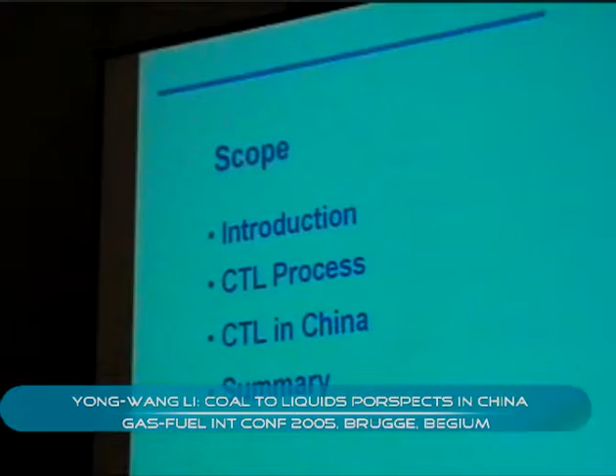First, I will introduce technology achievements in China at the Institute of Coal Chemistry. Many people in China have known the big plants of CTL, like Sasol and Shell, and the running of our pilot plant. They began to know the technology of CTL can practically convert coal to liquid hydrocarbon by FTS technology.

And now this opportunity is very large in China. China began to realize that applying CTL technology at the industrial and production scale can solve the oil resource problem.

Before talking about everything, I'd like to talk about the driving force in China: the oil supply and demand contradiction. In general, the confirmed coal reserve is above the magnitude of 2 compared to that of oil reserve. It is generally agreed that China has to use coal as a major primary energy in the long term.

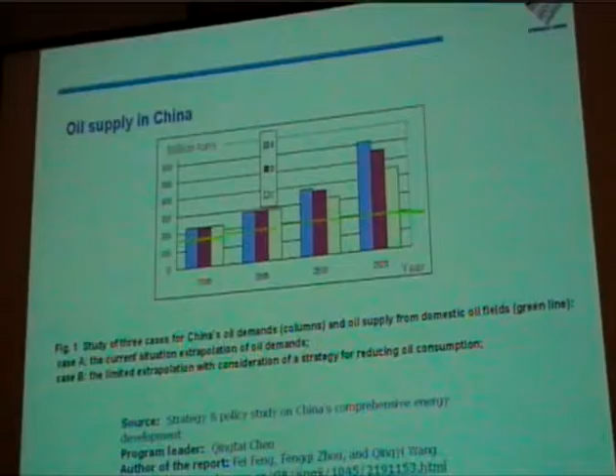This is the supply and production figure for oil demand. The blue line is the current situation extrapolation of oil demand. The red line is the limited extrapolation with consideration of a strategy for reducing oil consumption. The green line is the production scale over several years.

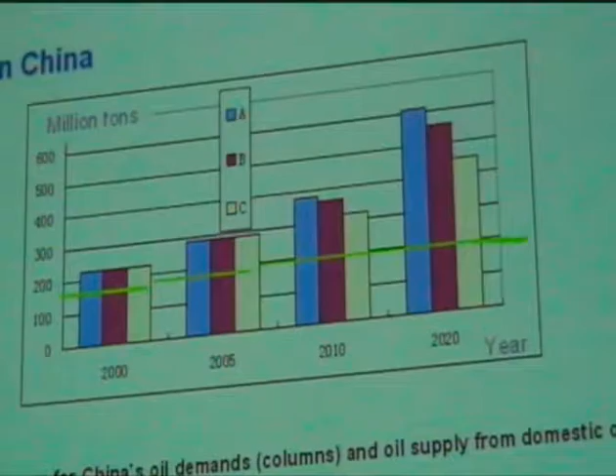From the figure we can see that by the end of 2004, we have imported oil from foreign countries, and the demand for this amount has reached 120 million tons annually. We can also see that by 2020, this amount will reach yearly 600 million tons. So there is a big gap between demand and the market in China.

China is trying to find a solution to solve this gap. Now they have realized that using FTS technology, CTL can fill some of this gap.

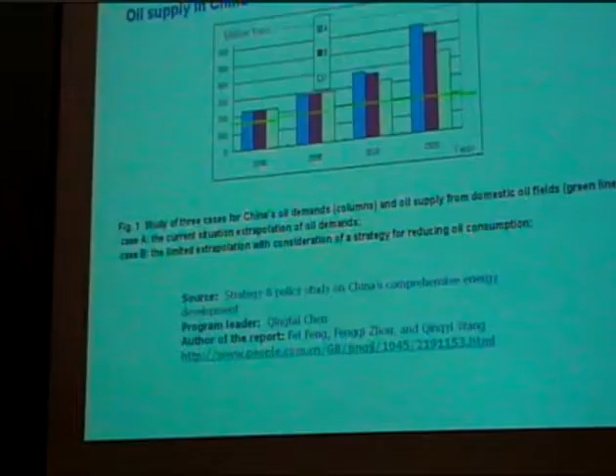This is a general CTL process from coal. Firstly, the coal gets fed to syngas and then purified to clean syngas. In the FTS process, it gets intermediate products: wax, oil, and LPG. The intermediate products, including upgrading, will get LPG, clean diesel, and naphtha. For this process, our main product is diesel.

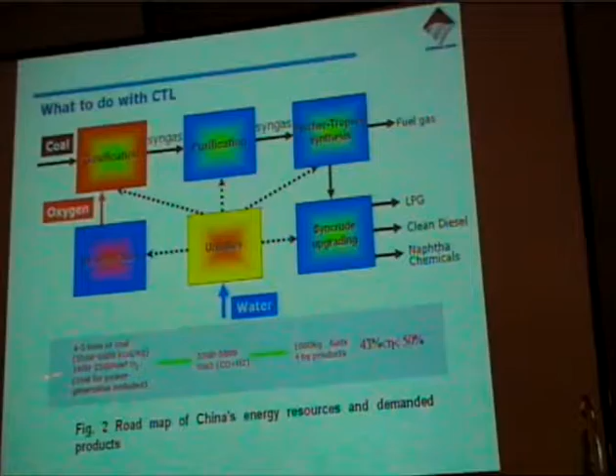We must have an air separation unit to supply oxygen for gasification. We also need utilities like cooling water, nitrogen, and similar support for the whole plant. This is the general rough data from coal to end production, and total efficiency is around 43% to 50%.

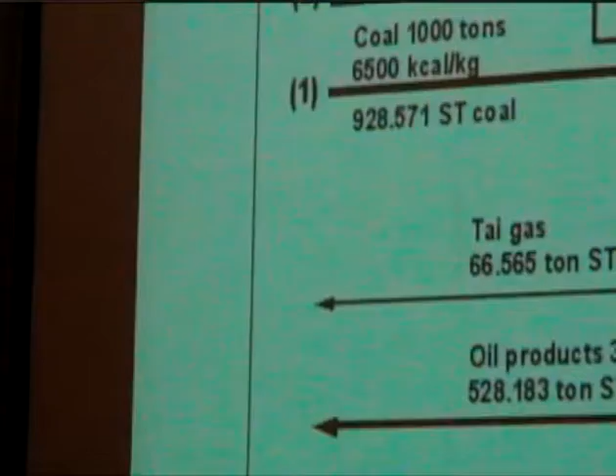This is the main frame of the in-and-out diagram of our whole reaction process technology, the CTL process. We have oxygen and coal as inputs to the process, and the end product is oil. For every value, we change it to a standard value for standard coal. This is rough data for electricity, steam, and similar outputs.

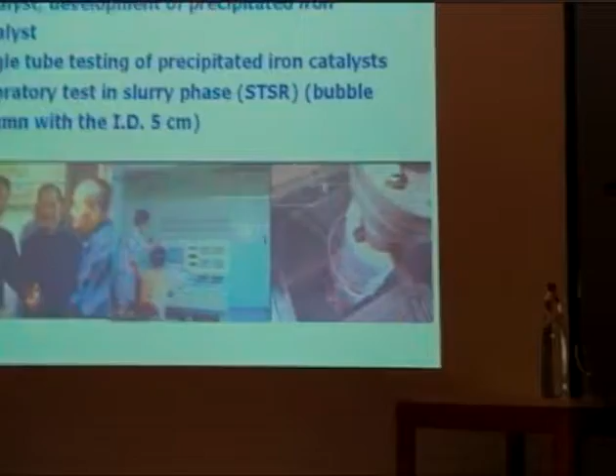Next, I will give the CTL research in China. CTL is mainly researched at the Institute of Coal Chemistry under the support of the Chinese Academy of Science, mainly in our institute. We divided the research into two stages.

One stage is before 1977, and from 1977 to 1983, we first developed a fused iron catalyst. This catalyst was first tested in a single tube. From 1983 to 1985, we built a 2-barrel-per-day multi-tube reactor pilot plant. From 1986 to 1987, we did single tube tests of an improved fused iron catalyst.

At the same time, we also developed a precipitated iron catalyst. In 1989, we did single tube testing of the precipitated iron catalyst, and at the same time developed laboratory tests in a slurry phase bubble reactor, with the bubble reactor having an internal diameter of around 5 centimeters.

From 1990 to 1993, we built a gasification plant with a capacity of 40 barrels per day, using a 50-barrel reactor, about 2,000 liters. During that time, because oil price was very low, this project could not run very well. After 1997, the oil price went up again, and FTS research changed in China again.

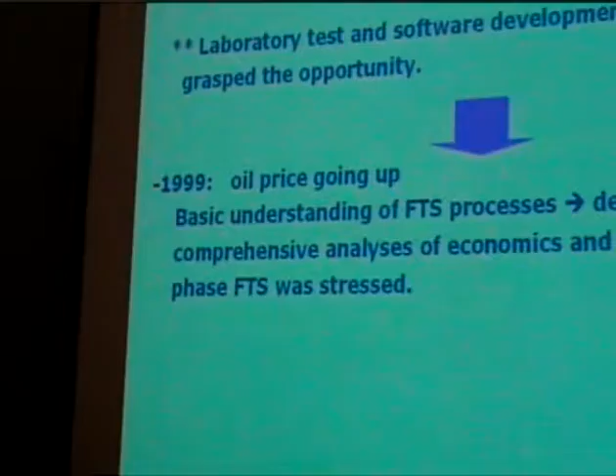Under support of the Chinese Academy of Science, we began the project again. This time, by economic and technical analysis, we decided to develop a slurry bubble reactor process.

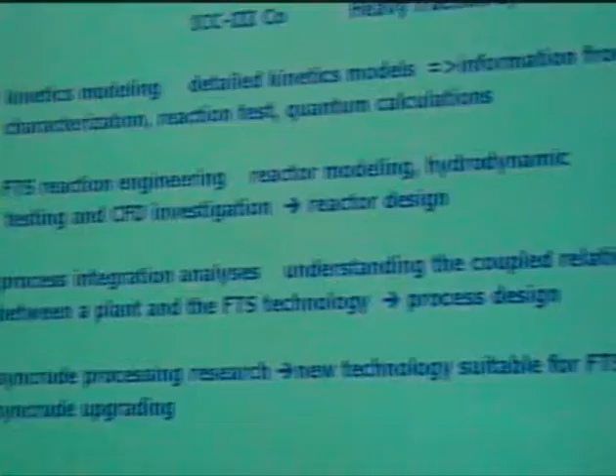First, we built a detailed kinetic model in our laboratory, getting information from catalyst characterization, reaction tests, and quantum calculation.

Based on the detailed kinetic model, we built a reactor model for the slurry bubble reactor. We also have facilities to do hydrodynamic testing and CFD investigation in our research group. Based on this information, we obtained the reactor design.

Based on the reactor model, we built a process model for the pilot plant and big plant using Aspen Plus software. For syncrude upgrading, we cooperated with other research groups to develop new technology suitable for FTS syncrude upgrading.

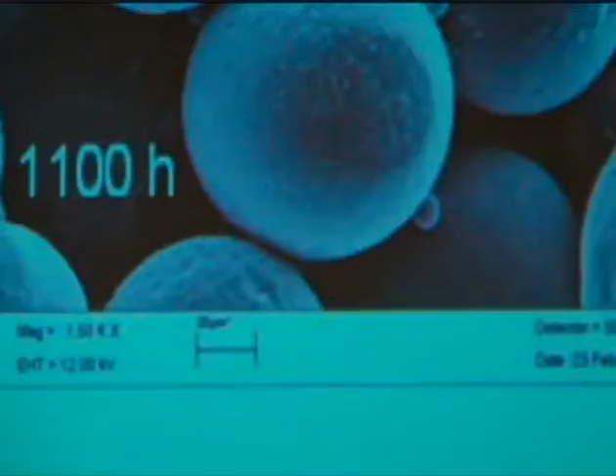This is a long-run test of the ICC1 catalyst. From the video, during the 1,100-hour test you can see the CO conversion, methane selectivity, and carbon 5 plus are always stable. This shows this catalyst can be used in our pilot plant and industrial scale plant. It's very stable.

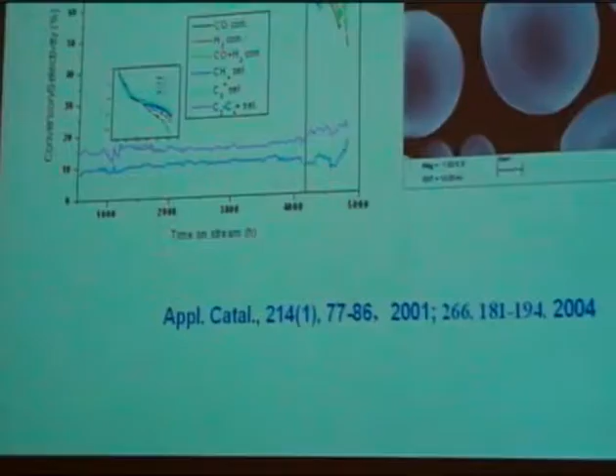This is a test of the ICC2 catalyst, an iron and manganese catalyst. From the figure, during 4,000 hours the selectivity and conversion are nearly stable, and the shape is very good. Our catalyst is formed by a spray drying process.

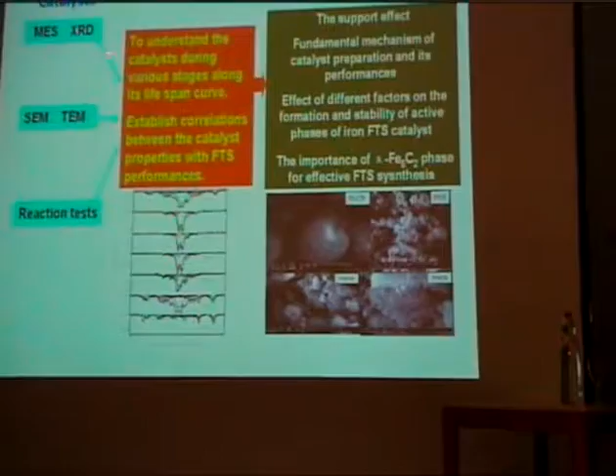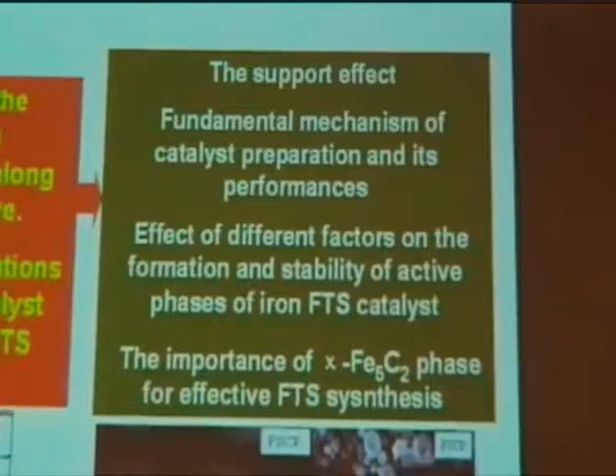In our laboratory, we use MES, XRD, SEM, and TEM to research the catalyst. From this information and reaction tests, we got a fundamental mechanism for catalyst preparation and its performance. We also learned the effect of different factors on the formation and stability of the active phase of the iron catalyst, and the importance of the Fe5C2 phase for effective FTS synthesis.

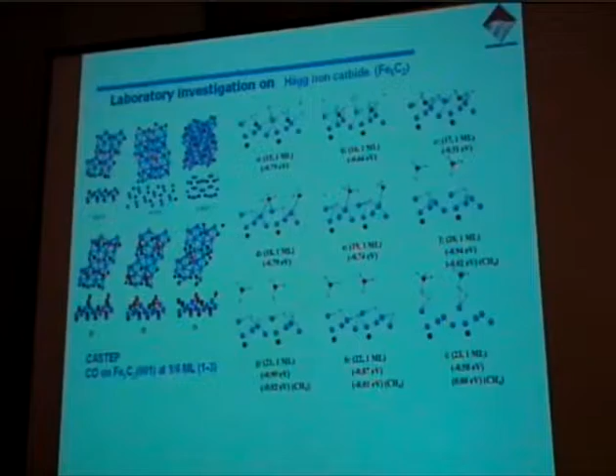In our research group, some of our researchers also did quantum calculations for CO and hydrogen adsorbed on the surface of the catalyst, Fe5C2. This is the result for hydrogen-to-CO ratio of 1.

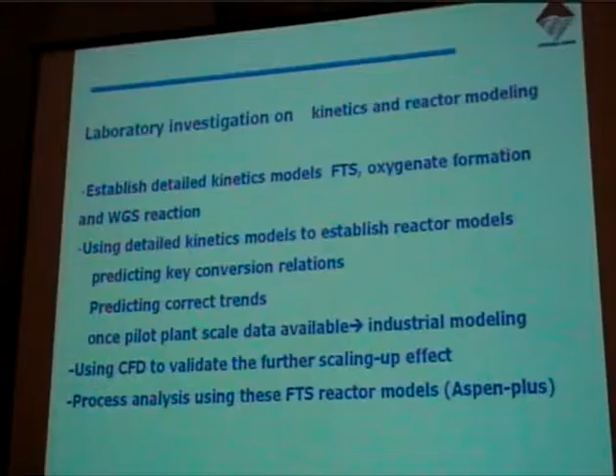So we summarize our laboratory investigation on kinetic and reactor modeling. We established a detailed kinetic model for the FTS and WGS reactions. We extended our kinetic model to oxygenate formation and used the kinetic model to establish the reactor model. With our reactor model, we predict conversion relations and correct trends. Once plant-scale data are available, we correlate them with our reactor model and process model, making our reactor model reliable at plant scale.

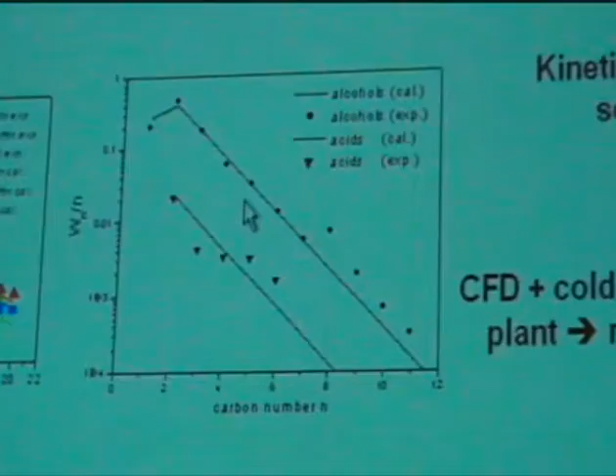We build the process model with Aspen Plus. This is the hydrocarbon distribution curve, showing experimental data and calculation data. This is the trend for oxygenate data, and this is the result of our CFD calculation.

The diameter is 0.35 meter. This is the CFD calculation for a bigger reactor with a diameter of 4.6 meters. In this diagram, we use Aspen Plus to build the process flow sheet for our pilot test.

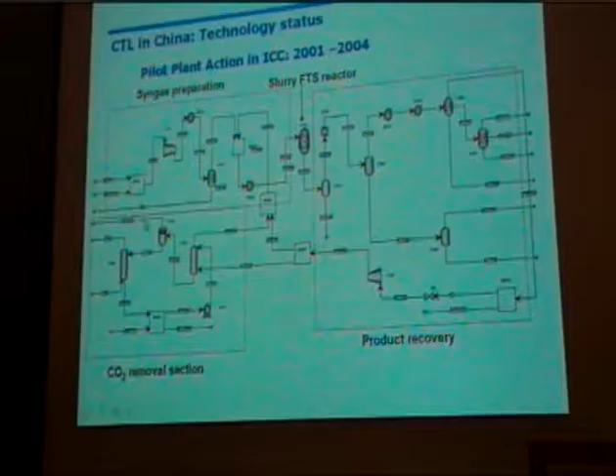We divided it into several parts: syngas preparation, slurry reactor, and product recovery. We also have a carbon dioxide removal section as an option.

Next I will explain the pilot plant operation. By the end of September 2002, we finished building our pilot plant, and the first run test lasted 25 days. During 2003, we conducted 3 rounds of core technology testing. Now we have finished the pilot plant study and begun the process design package.

This is the pilot plant operation, showing the basic process definition based on the pilot plant, without some rough data.

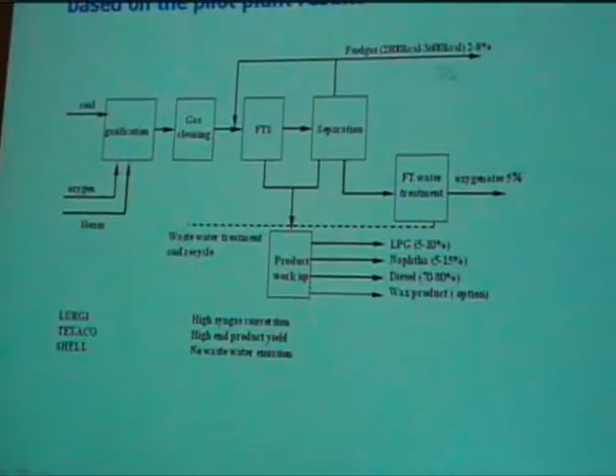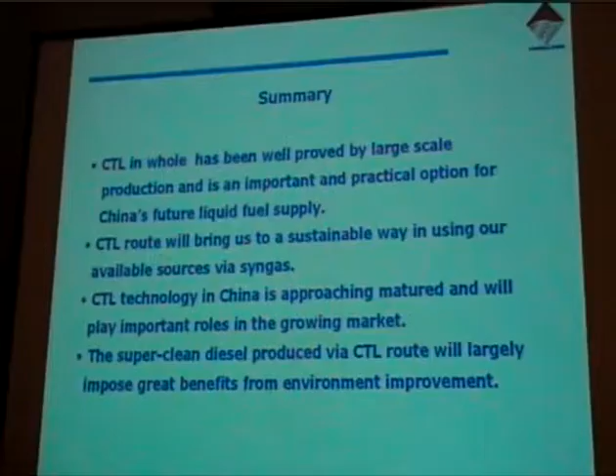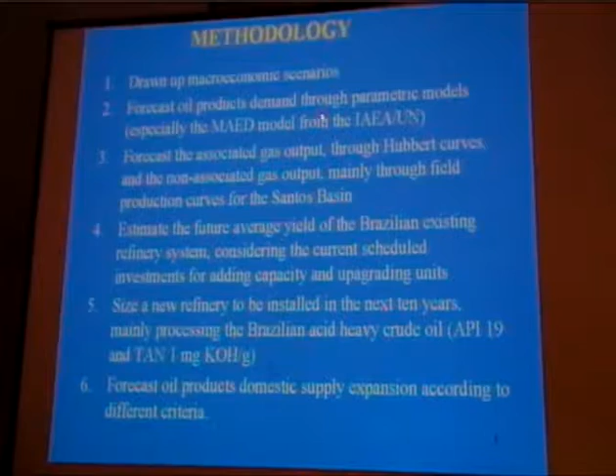This is the methodology. I have to sum up something here, but in summary, we have used several models for forecasting our fuel oil and oil products demand. These mathematical models mostly come from a joint study that we did with the International Atomic Energy Agency of the United Nations. We also forecast the associated gas output through Hubbert curves and the non-associated gas output mainly through field production curves for the Santos Basin.

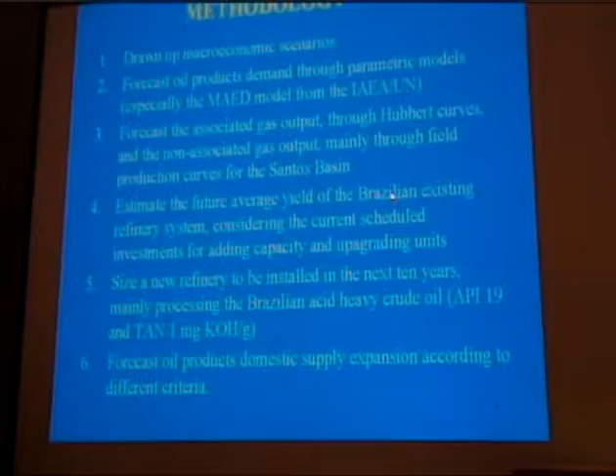Santos Basin is located at the southeast region of Brazil, and we have recent discoveries of non-associated gas that perhaps should be used, should be developed. And we estimate the average yield of the Brazilian existing refining system.

Brazil is converting its 12 refineries in order to improve diesel production and to reduce gasoline production, also investing in treating systems, treating units. We also size a new refinery to be installed in the next 10 years.

This is a great question in Brazil. Brazil will install a new refinery in the next 10 years. This is quite certain for Brazil. But as of today, we are studying several schemes: a scheme for gas oil, a scheme for petrochemicals, and even a scheme for gasoline.

But Brazil has surplus gasoline as of today, and this is the problem. Brazil is reaching self-sufficiency in oil production, but Brazilian oil is mostly acid heavy crude oil - not so heavy, but heavy; not so acid, but acid too. And we forecast oil products domestic supply expansion.

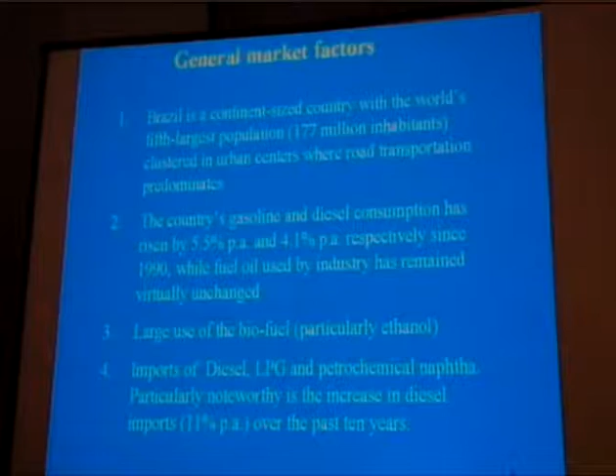General market factors - I don't know if everyone is aware about the Brazilian situation. Brazil is a continent size country. The country's gasoline and diesel consumption has risen by 6% per year and 4% per year. But gasoline is a specific situation in the 90s.

Now we are forecasting that gasoline consumption perhaps will be reduced in the next 15 years. We are going to see that in the presentation. This is a specific situation of Brazil, the large use of biofuels, mostly ethanol. Ethanol is competitive in Brazil, it's competitive with oil priced at $25,

$30 per barrel. So now we are restarting the use of ethanol in Brazil. In fact, we use ethanol as an additive to gasoline, and we have some old cars with ethanol dedicated motor fuels. But now we are starting the use of ethanol by using flex fuel cars. And this is important: Brazil imports a lot of diesel, LPG, and naphtha. Diesel is the great concern for the Brazilian policy.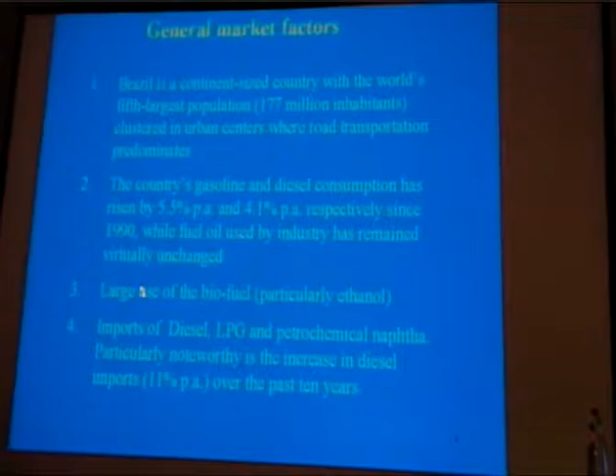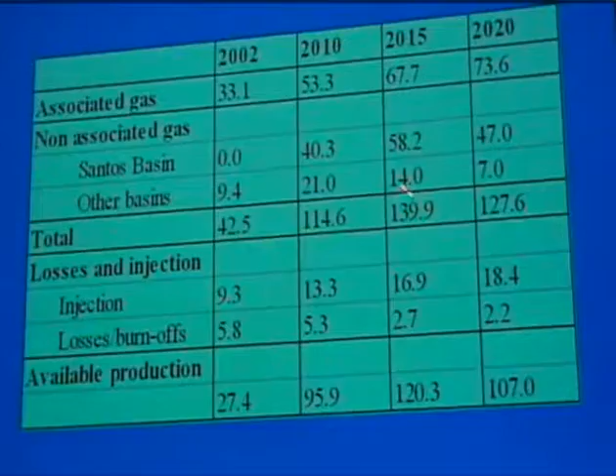This is our natural gas output forecast. As I told you before, we used Hubbert curves to forecast associated gas. In fact, we forecast oil production, and the associated gas came from the oil production forecast.

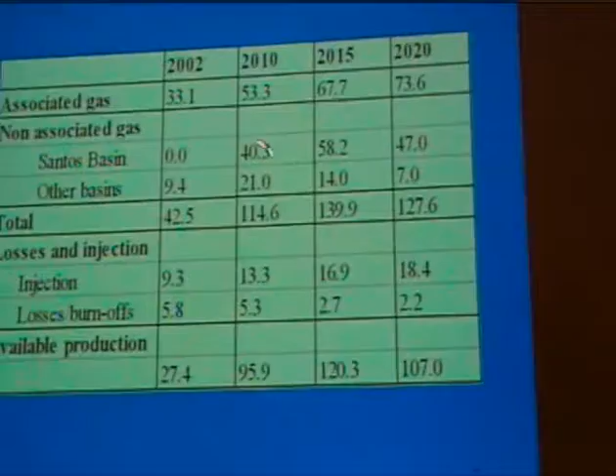And here we have the Santos Basin. Santos Basin was discovered in 2002, and we really do not know for certain what the proven reserves of Santos Basin are—perhaps something between 300 and 400 billion cubic meters. And this can be the expected production coming from the non-associated gas in Santos Basin.

This is a quite new situation in Brazil. In fact, associated gas is the main gas output in Brazil, and now we are going to face a new situation.

Brazil also imports gas from Bolivia and Argentina—around 30 million cubic meters per day from Bolivia, and around 10 million cubic meters per day from Argentina. So this can be the available production in Brazil. I also have to tell you that Santos Basin and this associated gas are also located in the southeast region of Brazil. So the southeast region concentrates the refining, the market, and also the oil and natural gas production in Brazil.

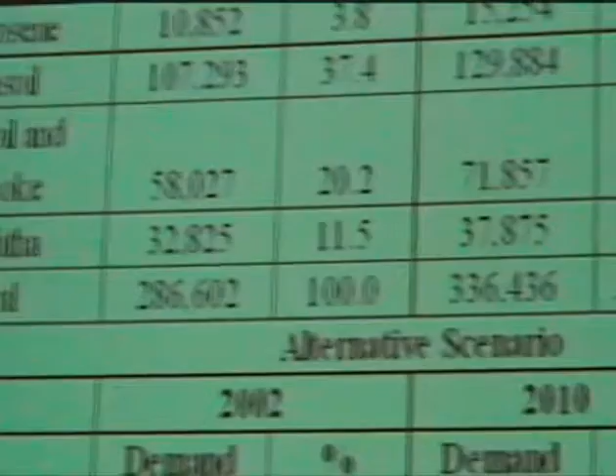So we ran several macroeconomic models, and also econometric and parametric models for oil products demand. We also ran some optimization models for oil products supply and demand, and we have this result. I can stress this result and its details—I think in the paper some of the details are also expressed.

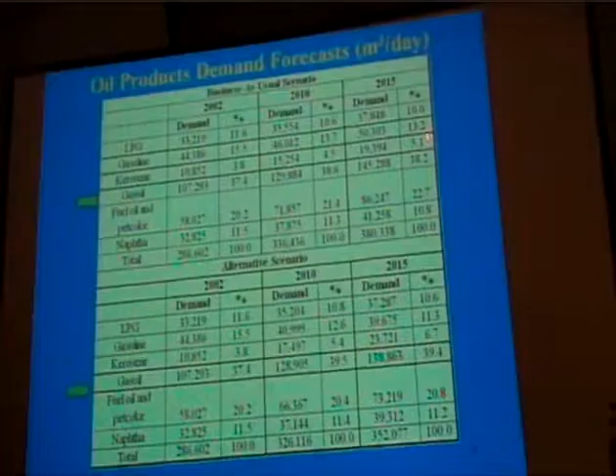But the important thing here is we had two scenarios. In this scenario we have more flex fuel cars and fuel conservation programs. In this other scenario, you have a kind of fixed, frozen situation. But in both scenarios, gas oil—diesel—is going to increase. And we have a situation of gasoline not increasing very much in the business-as-usual scenario, and even decreasing in the alternative scenario.

This is a specific situation facing Brazil. Brazil has surplus gasoline and has to increase diesel production. The refineries in Brazil also have, as of today, a large yield of diesel production, so we don't have very much potential to increase gas oil production in our existing refineries. Perhaps we're going to build another gas oil refinery in order to face this problem.

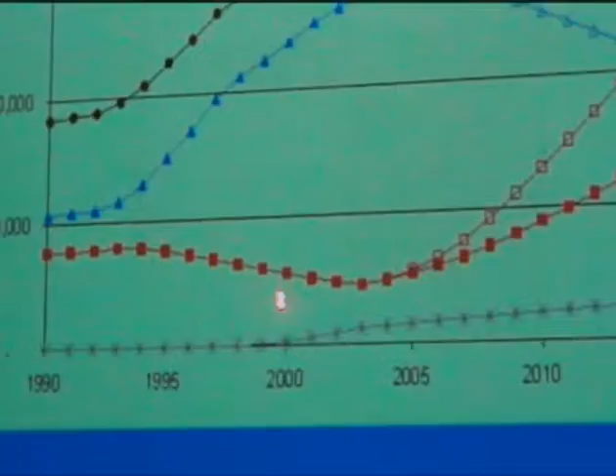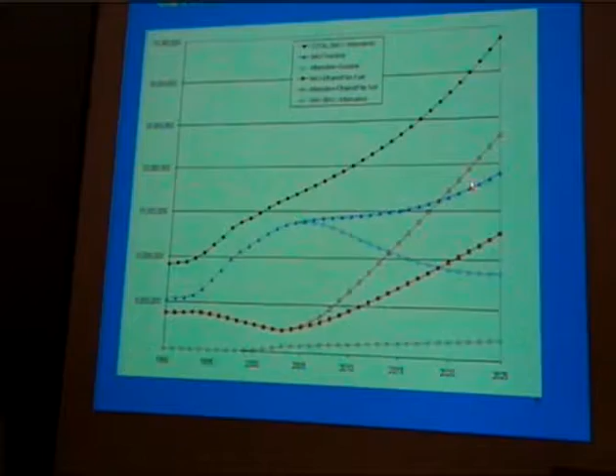And this is the ethanol fleet. As we can see, this ethanol fleet is going to rise drastically because of flex fuel cars. As of today, 70% of Brazil's new cars are flex fuel, so perhaps this will be 100% in the next 5 years for light vehicles. Flex fuel cars can run with ethanol or gasoline. But since ethanol production is also concentrated in the southeast of Brazil, and the light vehicle fleet is concentrated in the southeast of Brazil, mostly flex fuel cars will run with ethanol as fuel.

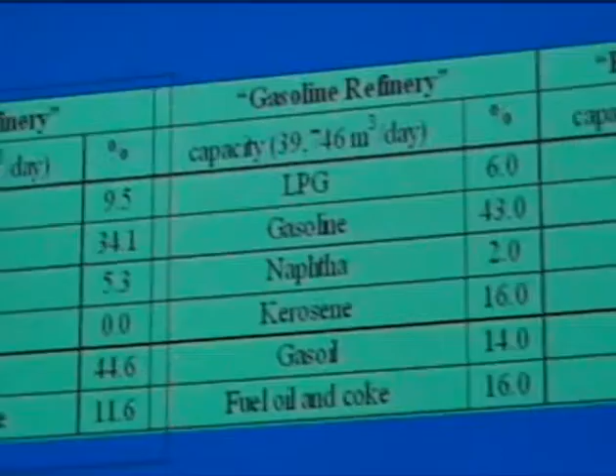We also sized 3 options for Brazil. In fact, in our paper we focus on this situation, the gas oil refinery. These are 3 sized refineries, part of our study also for the Ministry of Mines and Energy.

But also this refinery here is perhaps the most likely refinery for the next 5 years, because of some private partners willing to invest with Petrobras in the southeast region of Brazil too. But perhaps this will not be a petrochemical refinery as shown here with a DCC unit, but rather a petrochemical refinery more dedicated to propene and ethene.

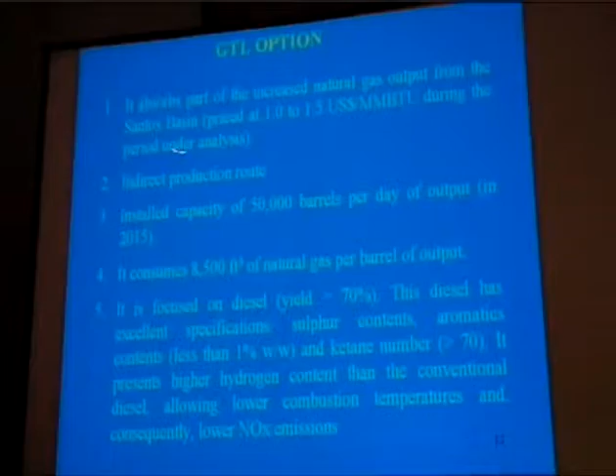The GTL option will absorb, as I told you before, the Santos basin production, the indirect production route. In fact, this GTL option was not sized by us; it came from scientific literature. We are not experts in GTL. In our university we have some teams studying GTL, but for us here the most important thing was to have a kind of grass-root plant and forecast, as a sensitivity analysis, the impacts of a GTL plant on the optimization of fuel supply in Brazil.

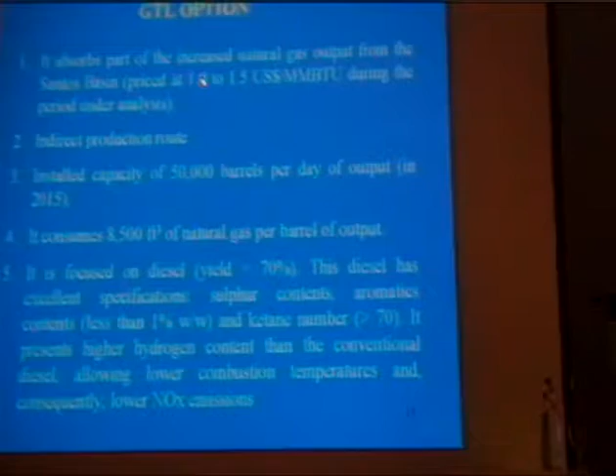So for our gas oil refinery, as planned and sized by us, we have the detailed sizing. We have some $3 billion of investment and a given capacity. And the GTL plant, which comes from the literature, is $1.5 billion.

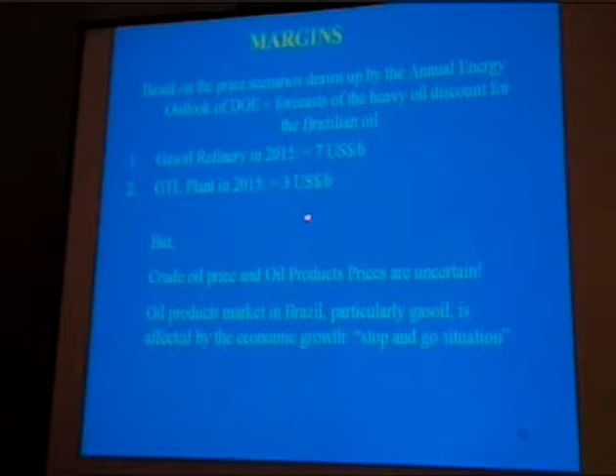The margins in 2015 for the gas oil refinery are forecasted to be between $5 and $10 per barrel. It depends on the oil price. We used the outlook scenario of the DOE for oil price, but also had to forecast the oil price discount due to the characteristics of Brazilian oil, which is acidic. We have some models to forecast this discount for Brazilian oil.

As of today, Brazilian oil faces a discount of between $10 and $12 per barrel against the refinery acquisition cost in the US. But historically this was $5 to $7 per barrel.

The GTL plant has a lower margin, but crude oil price and oil product prices are quite uncertain. Also, the oil products market in Brazil, particularly gas oil, is affected by economic growth. As I told you before, gas oil is not used for light vehicle transportation; it's mostly used for freight transportation in the industrial sector. Brazil faces a stop-and-go economic situation, for example 4% per year GDP growth, then negative growth, then 5% again. So we have this kind of stop-and-go situation.

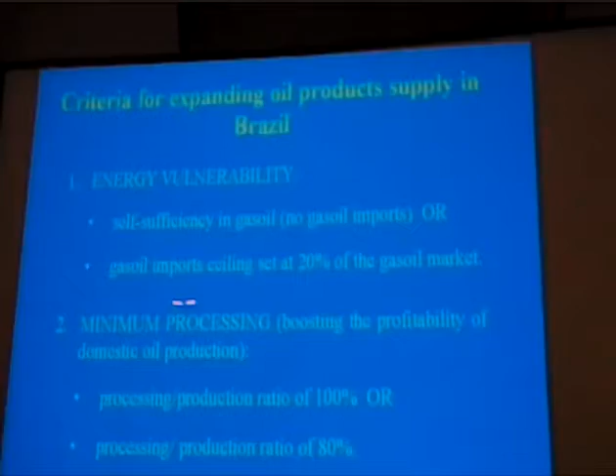Then we have these criteria, used as restrictions in our optimization model. We have an optimization model in order to maximize the revenue of the refinery system in Brazil, subject to restrictions, and this is a possible restriction: energy vulnerability.

This is a kind of historical policy in Brazil to ensure self-sufficiency. For gas oil, this is a stronger policy, but this is, let's say, the most likely policy for the Ministry of Mines and Energy, to have a ceiling set at 20% of the gas oil market. This is perhaps the target of the Brazilian oil company, to process Brazilian crude oil and boost the profitability of domestic oil production.

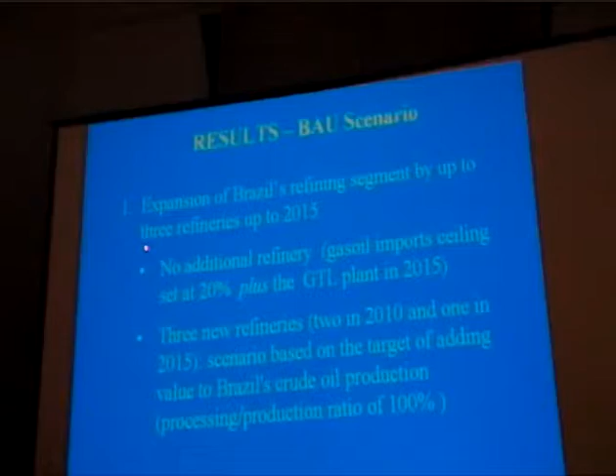Coming to the results, as you can see, in the business-as-usual scenario we expand the Brazilian refinery system by up to 3 refineries. But using the GTL plant, we do not need a new refinery under the vulnerability scenario criteria. GTL plants tend to be less versatile than a refinery, but Brazil now faces high interest rates and GTL has a lower fixed cost, so perhaps the GTL plant can be a useful solution. The alternative scenario is quite the same situation.

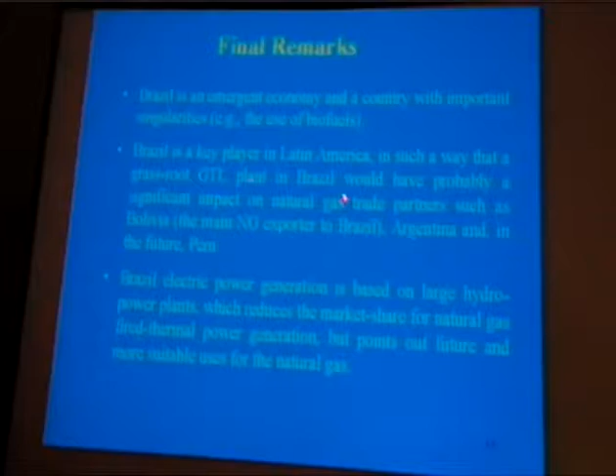I'll go through the final remarks. Brazil is a key player in Latin America, and a GTL plant in Brazil would probably have a significant impact on natural gas trade partners, as I mentioned - Bolivia, Argentina, and in the future, Peru. But the natural gas in Brazil will not be used much for natural gas-fired thermal power plants - it's not competitive with hydro, coal, or biomass. So we have to find uses for the natural gas. GTL can be a future solution.

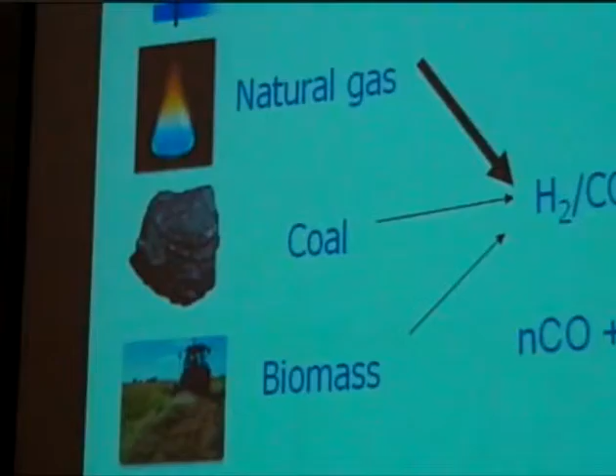Today I will talk about transient studies of the elementary steps of Fischer-Tropsch synthesis. This work was performed in Lille, in the laboratory of catalysis. Some general information: in Fischer-Tropsch synthesis we produce valuable hydrocarbons from synthesis gas, which can be generated from natural gas, coal, or biomass.

If we talk about chemical thermodynamics, at the usual conditions of Fischer-Tropsch synthesis, chemical thermodynamics favors the reaction at temperatures up to 340 degrees C and pressures up to 40 bars. If we talk about the yield of hydrocarbons, the yield depends mostly on chemical kinetics - which is what I'm going to talk about now.

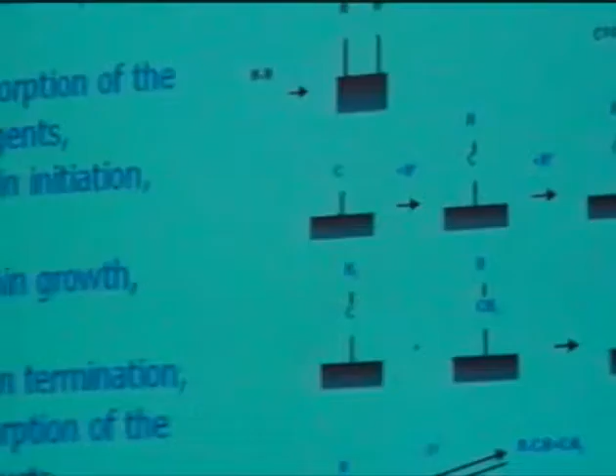The next slide shows a simplified, brief mechanism reaction pathway of Fischer-Tropsch synthesis, deduced from the literature. The first step is adsorption of hydrogen and carbon monoxide. The second step is chain initiation, which is produced...

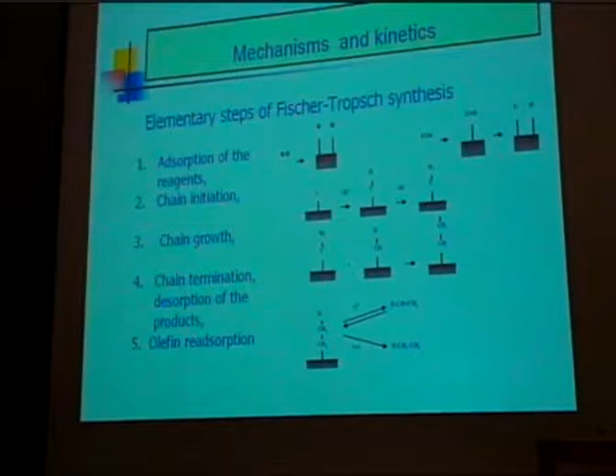I will continue. The first step is adsorption of hydrogen and carbon monoxide. The second step is chain initiation, which results in production of a CHx monomer. The third step is chain growth - polymerization - and then chain termination, which results in desorption of paraffin and olefin. If we consider Fischer-Tropsch kinetics, we have to take into consideration the possibility of olefin readsorption.

The objective of this work is to study the key elementary steps of Fischer-Tropsch synthesis in a pulse reactor, under transient conditions. We will talk about hydrogen chemisorption, carbon monoxide chemisorption, olefin chemisorption, and carbon monoxide hydrogenation to methane - right now we are not considering polymerization. In this work we use a cobalt-silica supported catalyst promoted with ruthenium, in a pulse reactor with detection of the product by mass spectrometry.

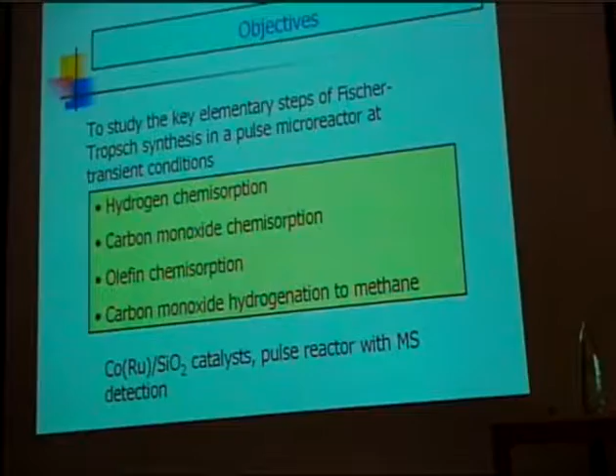The outline of the talk: first we discuss the kinetics of hydrogen and carbon monoxide and olefin chemisorption. Then, on the basis of this data, we build hypotheses about the steps, and try to use the hypotheses to model the transient responses during carbon monoxide hydrogenation to methane.

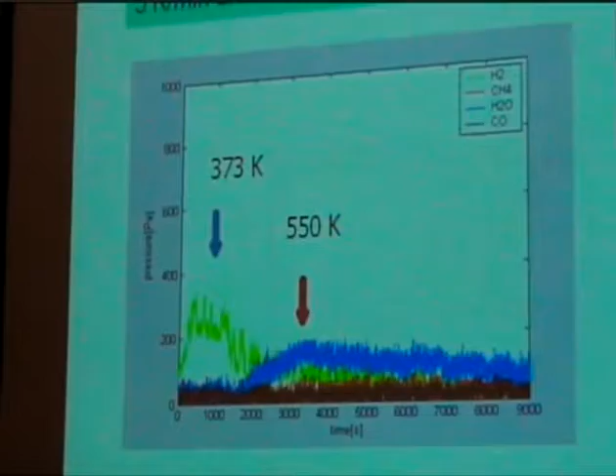First, some data about hydrogen chemisorption at moderate temperature. Here we adsorb hydrogen at relatively low temperature, a little higher than ambient, and measure irreversible hydrogen uptake by the catalyst. When we measure the TPD with detection of the product by mass spectrometry for this catalyst, we see desorption of hydrogen at about 373 K, and at higher temperature there is desorption of water.

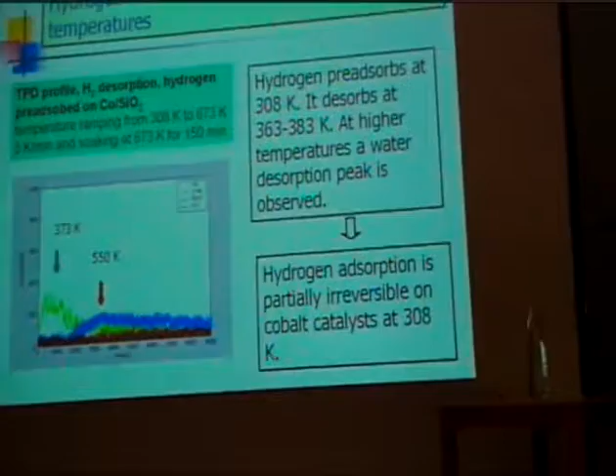What hypothesis can we deduce from this data? Hydrogen adsorption is partially irreversible on the cobalt catalyst at relatively lower temperature - there is hydrogen uptake by the catalyst, and hydrogen desorbs from the catalyst at really low temperatures.

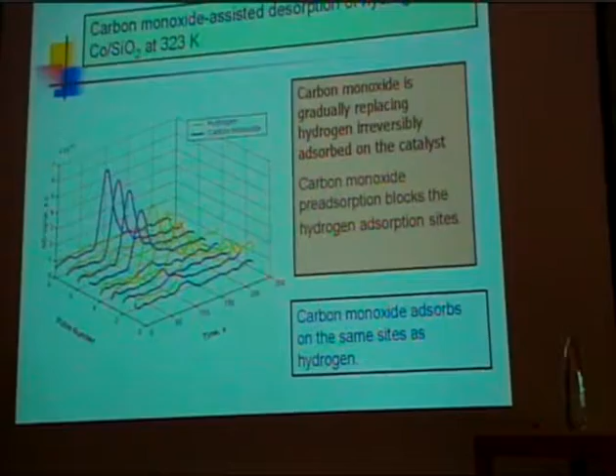We then studied adsorption of carbon monoxide on the catalyst with preadsorbed hydrogen. When sending a pulse of carbon monoxide onto the catalyst with preadsorbed hydrogen, we see desorption of hydrogen - meaning carbon monoxide is gradually replacing the hydrogen that was irreversibly adsorbed. In experiments where we preadsorbed carbon monoxide and tried to replace it with hydrogen, there was no effect. This means carbon monoxide preadsorption blocks the hydrogen adsorption sites where hydrogen adsorbs irreversibly, suggesting carbon monoxide and hydrogen probably adsorb on the same metal sites on the catalyst.

Then we studied hydrogen adsorption at higher temperature, closer to Fischer-Tropsch reaction conditions. In this case, no irreversible hydrogen uptake was observed, and when we sent pulses of hydrogen, they were not broadened after contacting the catalyst.

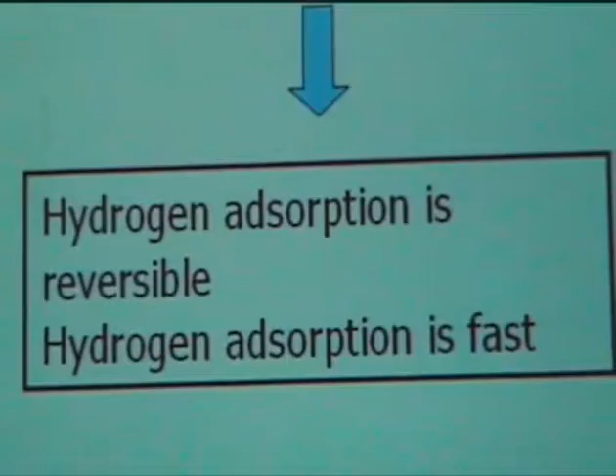So in this case, we see that since no irreversible adsorption is observed, hydrogen adsorption is mostly reversible, and hydrogen adsorption and desorption are relatively fast, not broadening the pulses which are sent into the catalyst.

So then we studied carbon monoxide adsorption. This is a pulse of carbon monoxide in a flow of helium at 423 K. You can see here that the first pulse of carbon monoxide is completely adsorbed by the catalyst, so there is irreversible carbon monoxide uptake by the catalyst at this temperature.

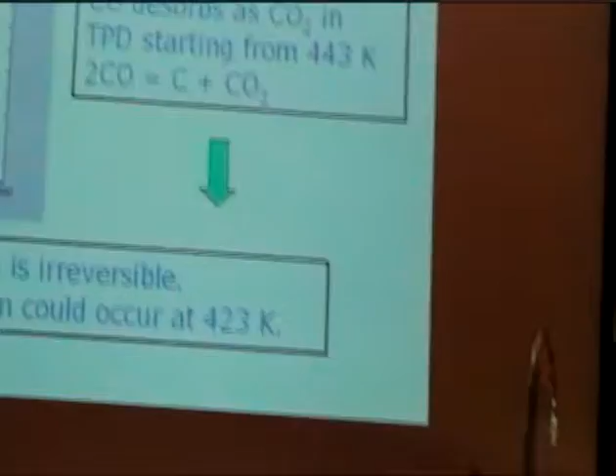After sending several pulses of carbon monoxide, we measured TPD with MS detection. You can see here that there is no carbon monoxide desorbing from this catalyst when we start heating from this temperature to higher temperature. We can see only appearance of CO2, starting from 443 K.

So from this, we suggest that carbon monoxide adsorption is probably irreversible since the pulse is completely adsorbed by the catalyst. And we also suggest that there is carbon monoxide dissociation, since the only product of carbon monoxide adsorption is CO2.

So then we also studied adsorption of propene, an olefin, on cobalt catalyst. In this case, we have different phenomena being produced. First, when we send the pulse of propene to the catalyst, we see that some of the propene is being chemisorbed by the catalyst. However, we can also see that there is some release of propene.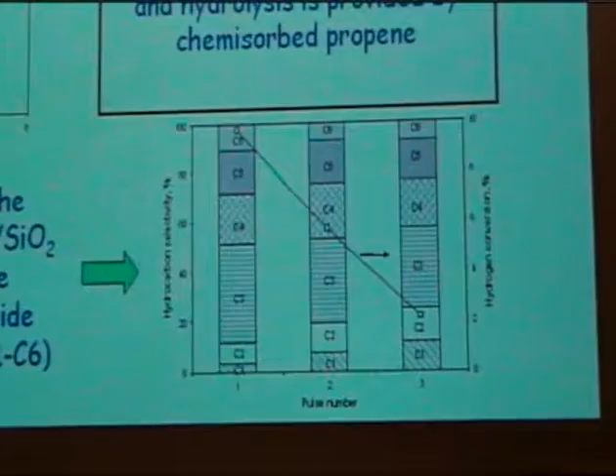So what we call here is the effect called propene autohydrogenation. This reaction was previously observed on monocrystals of cobalt metal and on platinum catalyst. What happens here is that propene is adsorbed, and during the absorption it releases some hydrogen, which is involved in hydrogenation at lower temperatures of propene to propane.

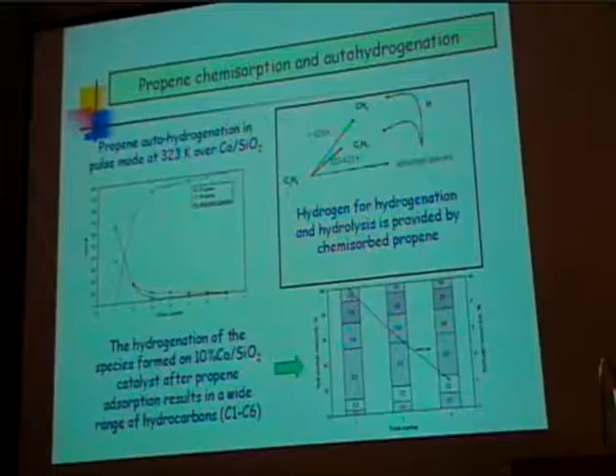At higher temperature we can see that there is production of some methane. The second step here was to study what really happens, which species we have on the surface of the catalyst. For that, we tried to hydrogenate the chemisorbed propene species with hydrogen. When we did this, we can see that we have a whole bunch of hydrocarbons from C1 to C6, meaning that during propene chemisorption on cobalt catalyst, we have some cleavage of carbon-carbon bonds.

So now to summarize, I have to summarize some hypotheses which will be used later on for modeling. The first is we suggest that hydrogen absorption is fast and reversible at Fischer-Tropsch reaction conditions, and carbon monoxide absorption is irreversible and dissociated. So then we will use this approach for the modeling here.

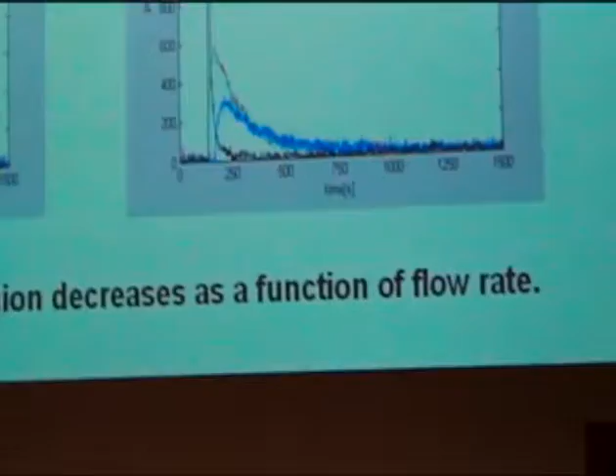So here we did the experiments sending a pulse of carbon monoxide in a flow of hydrogen on this catalyst, in the flow of hydrogen. Here you can see the responses which we have. The first very narrow peak is carbon monoxide, which is not reacting in this condition.

The first broad peak is methane, and then we see also water. In this condition, because we have a lot of hydrogen, we see only methane, we don't see any hydrocarbons. You can also see the carbon monoxide conversion as a function of flow rate, which is normal, as conversion depends on the residence time.

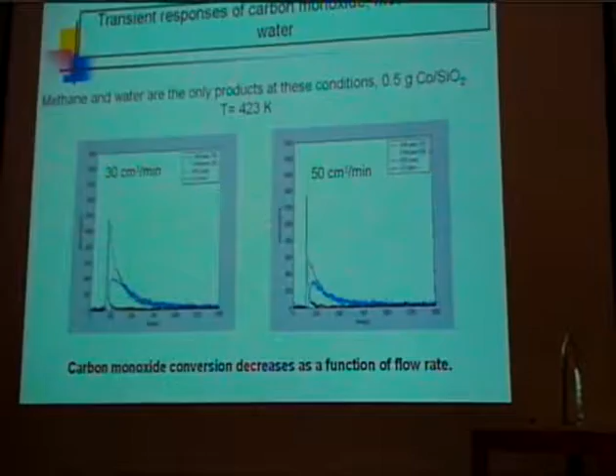So then, using this hypothesis that hydrogen absorption is reversible, we suggest it is quasi-equilibrated at this temperature. Carbon monoxide absorption is irreversible and dissociative, and we also admit that water absorption can be reversible. So here we have considered three mechanisms, based on this hypothesis, to select the best one.

So for modeling, we have been using a modified Kobayashi model. In this case, the catalytic reactor can be represented by a set of stirred tank reactors. For each reactor, we have been using a system of differential equations for gas components and for adsorbed species. We solve them using MATLAB software.

The best results we obtained for this mechanism, which is shown here, and here we show the results of fitting. You can see that we can fit pretty well carbon monoxide and methane. For water, the results are a little bit worse than for methane.

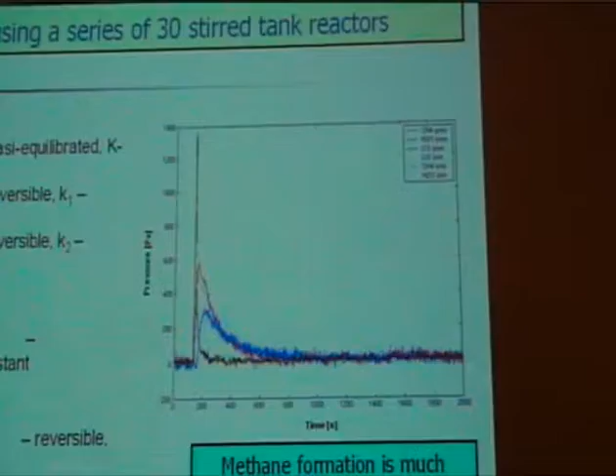We can also evaluate the set of kinetic constants for this mechanism. What we can see here, I just want to show you, is that we compare the constants K3 and K5.

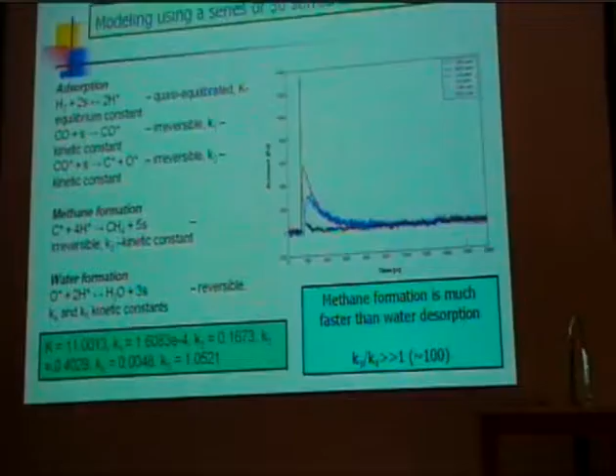K3 is the constant responsible for methane formation on the catalyst, and K5 is for water formation. We can see that K3 is much higher than K5, so methane formation seems to be much faster than water desorption from the catalyst. For this experiment, the factor is 100. So we can suggest that in some cases, water desorption from the catalyst can be a rate-limiting step even in steady state conditions.

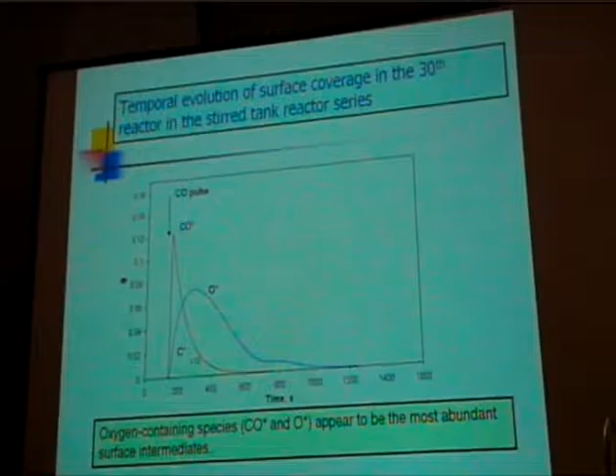The next slide shows the results of this modeling. We calculated the coverage of the catalyst, and we projected our reactor as 30 stirred tank reactors. So here is the last reactor. What happened when we sent a pulse of carbon monoxide? First, this is a pulse. The first carbon monoxide that adsorbs on the catalyst increases coverage by non-dissociated CO. Then there is dissociation to carbon and oxygen. From these kinetic constants, it follows that oxygen-containing species coverage is much higher than carbon species. So the oxygen-containing species, such as CO and oxygen, appear to be the most abundant surface intermediate during this reaction.

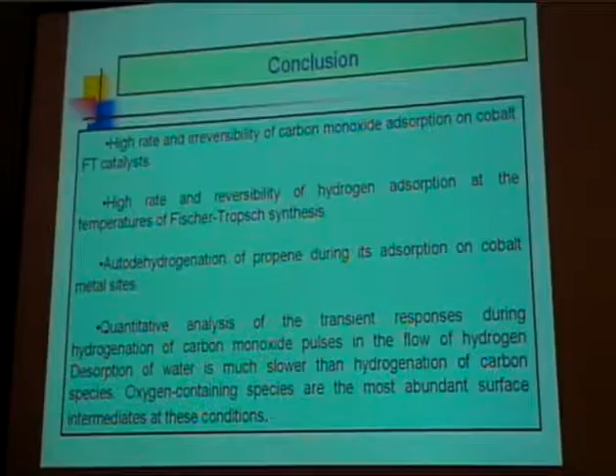Now, to summarize what I was talking about: we can see the high rate and irreversibility of carbon monoxide adsorption on cobalt Fischer-Tropsch catalyst, and high rate and reversibility of hydrogen adsorption at the temperature of Fischer-Tropsch synthesis. There is also auto-dehydrogenation of propene occurring during adsorption on cobalt metal sites, and we carried out quantitative analysis on the transient responses during hydrogenation of carbon monoxide pulses to methane. What appears here is that desorption of water is much slower than hydrogenation of carbon species, and these oxygen-containing species are the most abundant surface intermediate under these conditions.

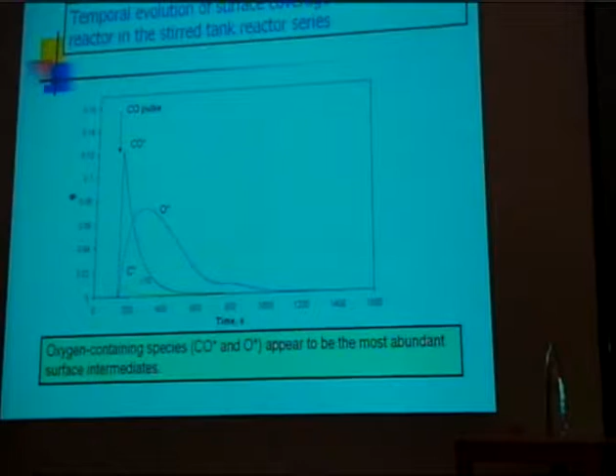I just showed you the concept which we obtained here. Basically, if we measure transient kinetics, there is no single rate-limiting step because the rate-limiting step changes during the reaction. So I think what we found here is that carbon monoxide adsorption is relatively fast, meaning that in some cases carbon monoxide dissociation is much slower than carbon monoxide adsorption. Then we have hydrogenation of carbon and hydrogenation of oxygen. In this case, hydrogenation of oxygen is much slower than hydrogenation of carbon, and at the end we obtain high coverage of the surface by oxygen-containing species. But if we compare the steps of adsorption and dissociation, dissociation is slower than adsorption.

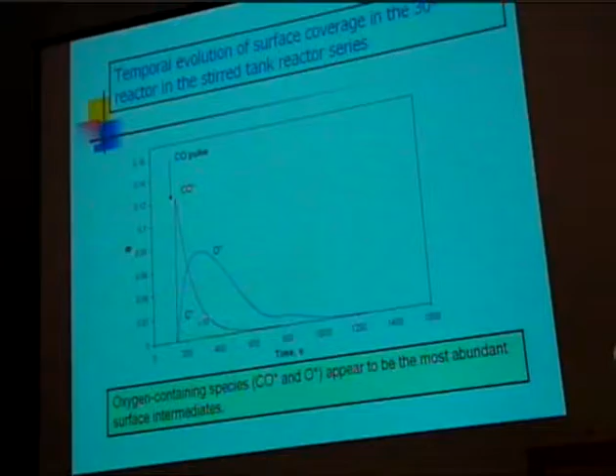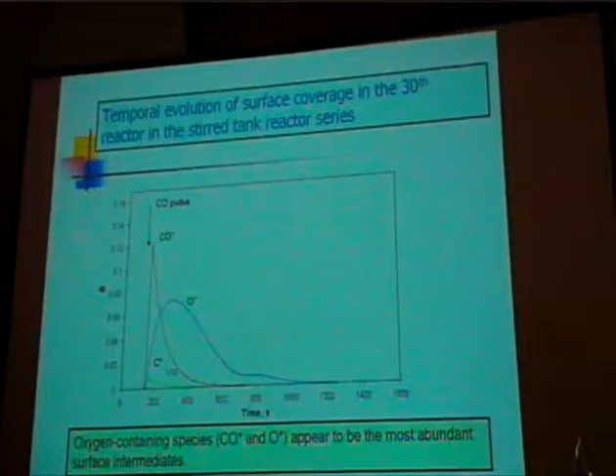But on the other hand, you said CO is irreversibly bound to the surface. Yes, in this case it's reversible in one sense, but in another case it was irreversible. I cannot understand this. No, it's irreversible because we have only one direction for the reaction, one flow from gas to surface. We don't have desorption of carbon monoxide from the surface back to the gas phase. It means the surface is covered with chemisorbed CO, and only a small part of that is irreversibly split into carbon and oxygen. Yeah, but it can be adsorbed — of course it's the first step, we suggest the first is adsorption. The carbon monoxide adsorbs molecularly, but it cannot desorb — it can only dissociate, it becomes fixed to the surface. So you see it adsorbs irreversibly because there is only one flow to the surface.

Further question? Something else important?

That's fine, there's one more point. You mentioned carbon — is this actually C1 carbon, or are these all C1 species together, like CH, CH2, CH3? What does carbon mean in your model? So it's a simplified mechanism which represents the transient response. Of course, in this case we cannot make any conclusion about the exact nature of the species. So it must not necessarily be elemental carbon — no, it can also be something else, so one has to be very careful with this. Thank you. So if you want to confirm it, we would have to do some spectroscopy studies, because from kinetics alone we cannot say exactly what it is.